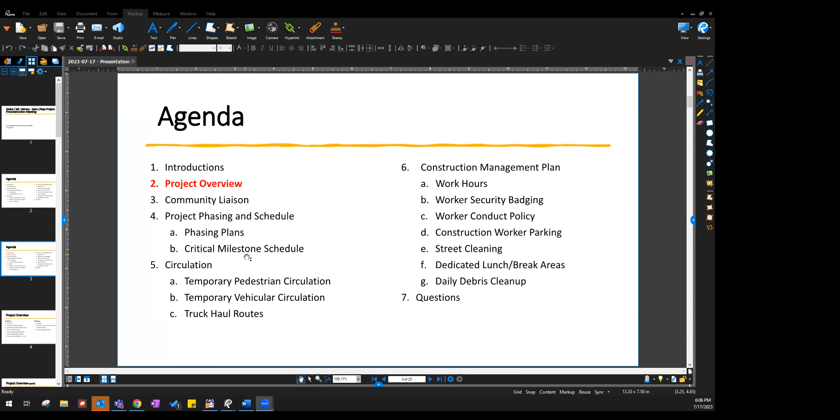Okay, hi everybody, thank you for joining us this evening. I'm Aaron Remolona. Thank you for your interest in our development between Glebe Road and Mount Vernon in the Arlandria-Chirilagua neighborhood. Stephen will be providing an overview of the project details in a moment, but I'll go ahead and summarize the history of this project and the key milestones that have gotten us to this point.

Our team has taken this project through the city's planning process from 2020 to 2022, and we received DSUP approval in July of 2022. This included numerous community meetings during this time. For those interested, recordings of these meetings are provided on our website. One of us will drop the link to the project page in the meeting chat. There's also a lot of general information about the project and an interest form for folks to sign up for if they would like continued updates of our progress.

Since receiving DSUP approval last summer, we've been working our way through the final site plan approval process and received this approval a month and a half ago at the beginning of June. In addition, at the end of last month, the project was approved for a $64 million commitment from the City of Alexandria through the Office of Housing. This commitment allows us to begin construction this summer. So we're here tonight to provide this overview of the construction process and our plan to mitigate the impact of construction on the surrounding areas to the best of our abilities.

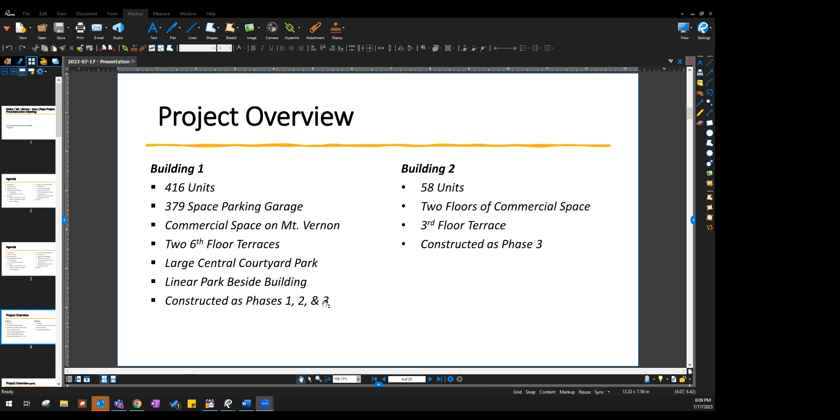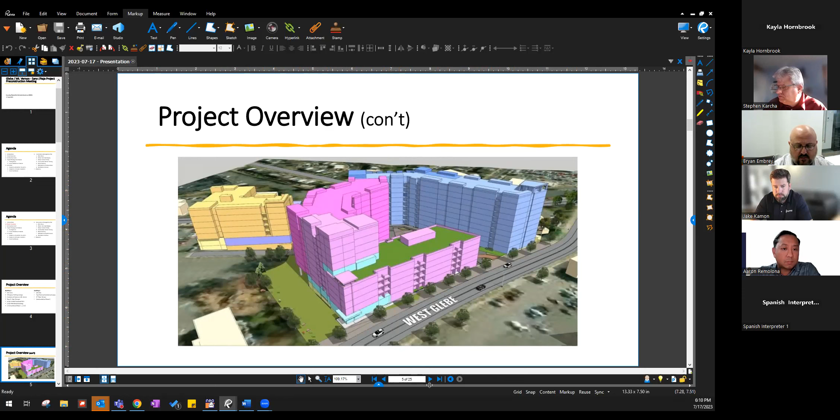With building 2, there are 5 stories of residential space above 2 stories of commercial space with an outdoor terrace here. This is the main entrance to the commercial space, and the residential lobby is located back at this corner.

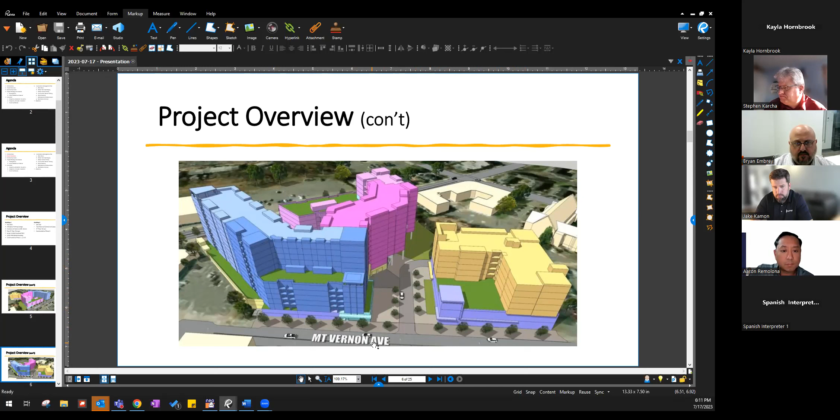As we've gone through the City of Alexandria's zoning approval process, the project requires us to appoint a community liaison, and that person is Aaron, who is with us. This information is posted on a sign located on site, with their web address and phone number.

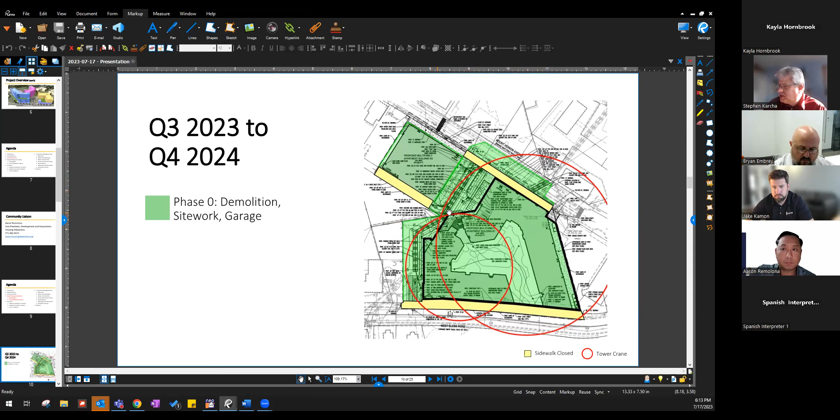There are numerous utilities that we need to install, including storm sewers that used to cut through the site. Those will be enlarged and go around the new building. These will be much larger to help assist with the stormwater issues that currently reside in this area.

The city is also undertaking a project to improve the storm structures and piping downstream. That will start in roughly a year. So through these two projects, the city's project and ours, the stormwater and flooding that occurs in this area should be much improved and mitigated.

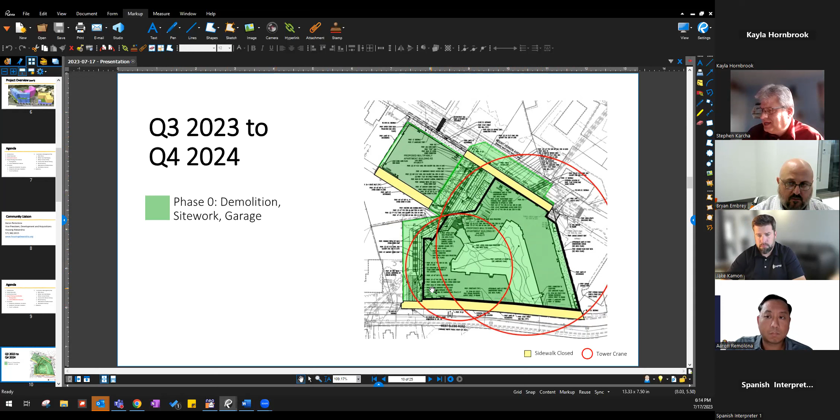Also during this time, from August until the 4th quarter of 2024, the mass excavation of the site will occur, as well as the excavation and construction of the garage. It's a 2-story garage at the Glebe side, and actually one story below grade at the Mount Vernon side.

Starting in Q4 of 2024, the first phase of building 1 will commence—that's this pink area located here, including the courtyard. Building 2 will also commence construction.

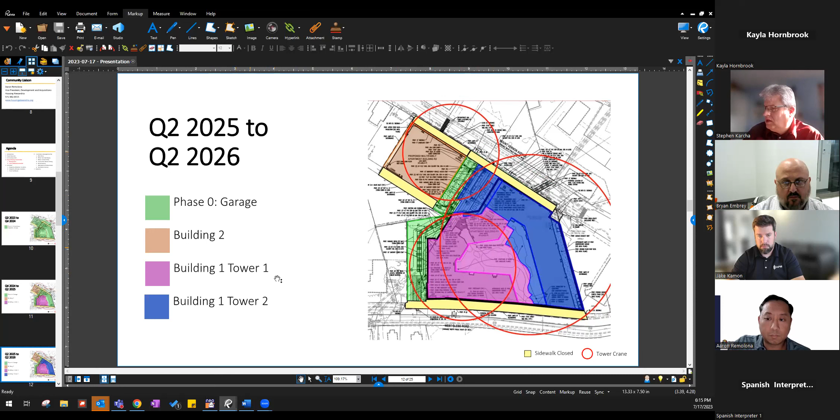This construction will go on until Q2 of 2025, at which time the second tower of building 1 will commence construction.

I should note that these red rings shown on these plans are the swing of the tower cranes. There'll be no lifting over the public streets or adjacent businesses. All the lifting will come up from closed areas that are closed off for construction and be within the confines of the construction site.

This leads us to Q2 of 2026, when building 2 and the first portion of building 1, with the garage, as well as the alleyway here, will be opened up and ready to occupy, leaving only building 1's tower 2 to finish in Q4 of 2026.

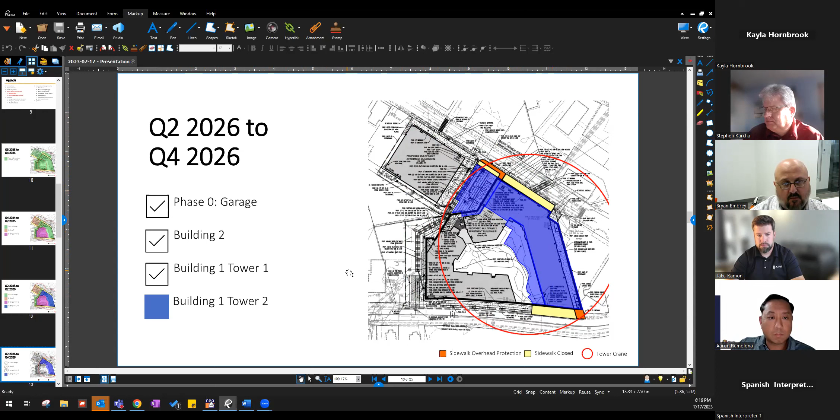To walk through the dates of construction: at the end of August, we'll start construction. From August through December of this year, we'll have the demolition of the buildings and installation of new utilities in Mount Vernon, Glebe, and on-site.

In December of this year, we will auger drill the shoring piles. We will not be hammer driving them, which is what you typically hear with that pound, pound, pound sound. We will not be doing that, so that we mitigate the noise to the surrounding neighborhood. We'll instead be drilling a hole and dropping the pile in its place—a much quieter operation.

When the shoring piles are complete in December of this year, the excavation will commence and continue through April of next year, 2024. When the excavation is near complete, the garage construction will commence and will go through October of 2024.

When the footprint under phase 1, the first tower of building 1, is complete, the garage portion—phase 1, that first tower of building 1—will commence construction, and that will occur through September 2026 along with the other buildings.

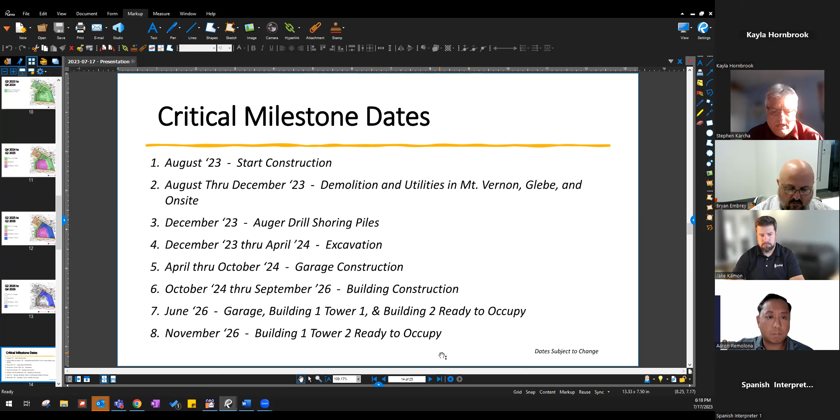In June of 2026, the garage, building 1 tower 1, and building 2 will all be ready to occupy. Five months later, building 1 tower 2, the second tower of that building, will be ready to occupy. These are the high-level milestones for the project.

I'd like to move on to circulation and discuss pedestrian circulation, vehicular circulation, and the truck haul routes. We know there's a lot of pedestrians who walk in this area and a lot of traffic on the streets. In some areas it's dangerous, so we are very protective of these measures. Safety is the highest priority in regards to pedestrian circulation, and I'm sure Bryan will agree that safety is the #1 priority on the job site.

Whiting-Turner will be securing sidewalk closure permits issued by the city. We will always have one sidewalk on a street open and available. We will not be closing down both sidewalks on Glebe Road or Mount Vernon Avenue. If we're working on one side, the other sidewalk will be open.

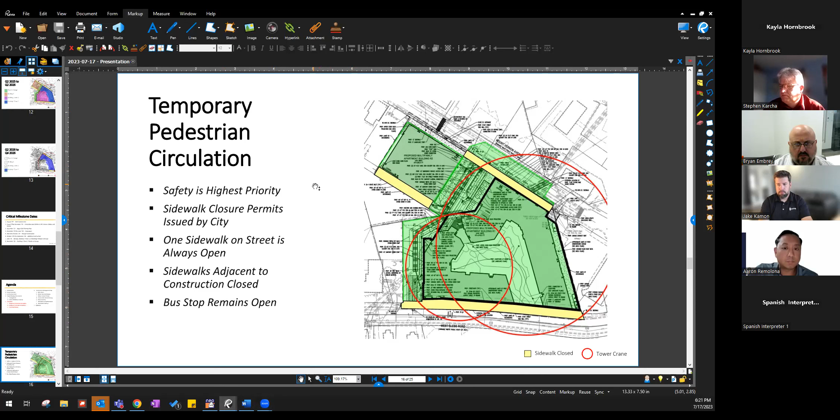Moving on to vehicular circulation: when Whiting-Turner does utility work out in the streets, and then when they pave the road at the completion of the project, we'll get lane closure permits issued by the city. Those will have traffic signs that direct you on where to go, and they'll also have flagmen out there directing traffic to ensure everyone moves through the space safely.

The majority of the utility work in the streets is located on Mount Vernon Avenue and will be completed this year. There is very limited utility work on Glebe Road, with the conduit crossing I mentioned and a couple of utility connections to existing utilities in the street. Those will also be completed this year.

From the beginning of the project, when we started at the end of August, the existing alley would be closed off from the back of what is currently the city parking lot, all the way to Mount Vernon. The reason it's closed for the duration, or near duration, of the project is because we have utility work - a storm box culvert that's 12 feet wide and 8 feet deep that needs to be installed at this location - and then it's used for construction access around the new building.

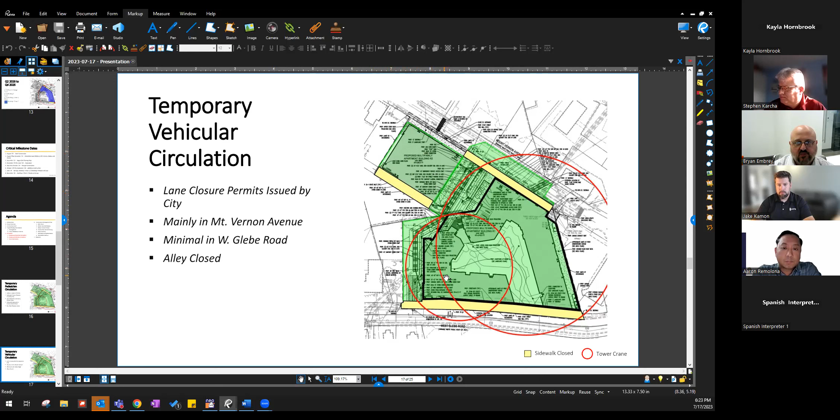Truck haul routes: our intention, based on initial discussions with the city, is that trucks will come from Route 1 and travel east back to Route 1. They will not be going out west or north to 395. This will all be confirmed when the city issues the haul route permits that Whiting-Turner will be obtaining for the project.

The intention is to have a clockwise circulation on site, with trucks coming in from Route 1, down West Glebe, turning into the site, or turning into what is currently the loading dock driveway.

That will become a passageway, a site access road going out to Mount Vernon during construction. Trucks would then exit right on Mount Vernon Avenue and head off east to Route 1. The reason clockwise circulation is proposed is so trucks can immediately turn right and not worry about crossing traffic, which causes a higher risk of accidents. Turning right out onto Mount Vernon Avenue also limits the risk of trucks having to turn left across oncoming traffic.

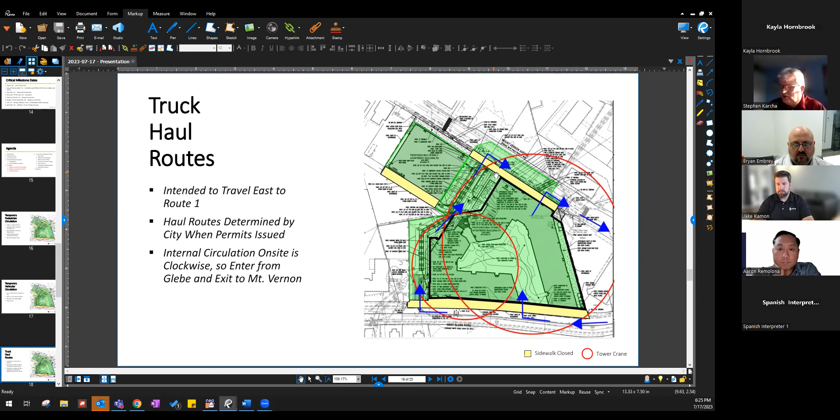I'd like to talk next about the construction management plan and some specifics. Work hours are 7 a.m. to 6 p.m. Monday through Friday, and Saturdays 9 a.m. to 6 p.m. There's no work permitted on Sundays or on City of Alexandria legal holidays. These are the maximum hours the City of Alexandria's noise ordinance permits construction work to occur, so we're not straying outside of those. This doesn't mean construction will go until 6 every day or that work will occur every Saturday, but these are the limits of the maximum time construction can occur.

Worker security badging: all workers on site will receive an orientation on their first day. This will go through the project requirements, the safety measures in place, and specifically these project management items we're discussing this evening. Once they complete their orientation, they'll be issued a numbered hard hat sticker that will be placed on their hard hats and assigned to each worker.

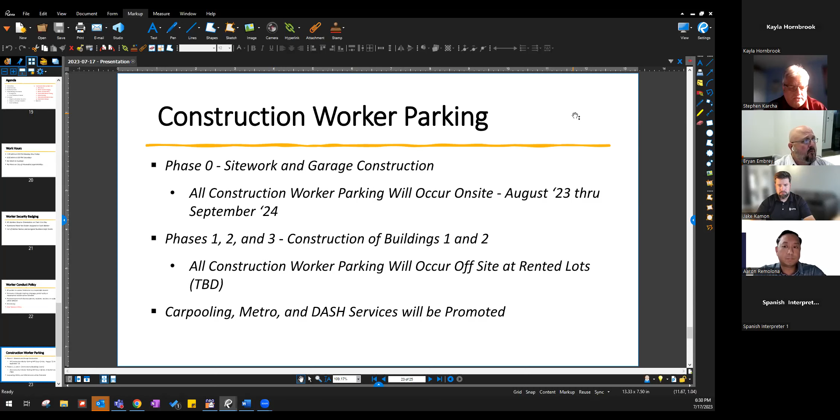Whiting Turner will encourage carpooling amongst their workers. A lot of workers already carpool, but that will be highly encouraged, as well as promoting Metro and DASH bus services.

Cleanliness: street cleaning will occur during the utility work and mass excavation portions of the project on a minimum weekly basis, and more often if it gets muddy out there. The city will make sure the streets are cleaned, but we'll be doing that proactively as well. Through the balance of construction, it'll be on an as-needed basis.

We found that in order to keep a job site more clean, it's generally lunch trash and break trash from when workers eat that gets blown around out of trash cans and through the site. So we require a dedicated area on site, located at least 20-25 feet away from adjacent properties, where all the workers can eat lunch and take their breaks. That's not to say they don't do it in the building itself, but they eat and meet in a confined area, which limits the spread of lunch trash and debris.

Whiting Turner will also be doing a daily debris cleanup. That'll be inside their site, making sure there's nothing to blow around, as well as walking the sidewalks on the exterior if anything is blown outside of their construction fence.

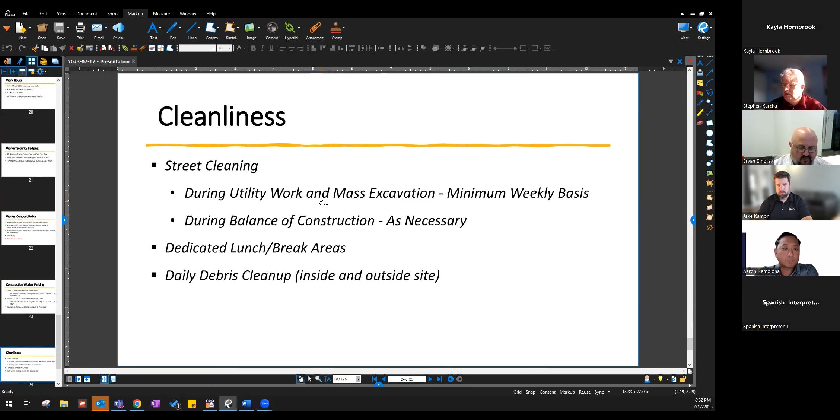And that concludes our presentation tonight. We're happy to address any questions that you have.